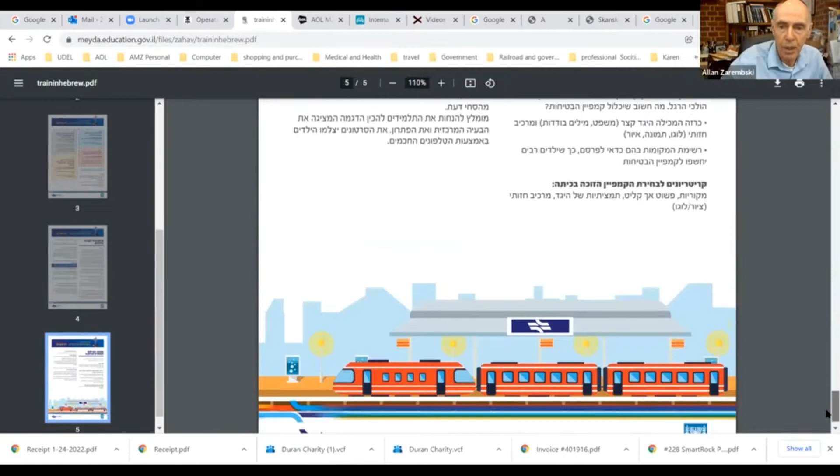But what I wanted to show you here is that there was a whole bunch of material put together in Hebrew. Let's see if it comes out here. There we go. So this is the kind of material, among other types of information, that's available in Hebrew for level crossing awareness. This is put out by Rakevet Israel and the Ministry of Transport.

Let me stop sharing this and let's start talking about turnouts.

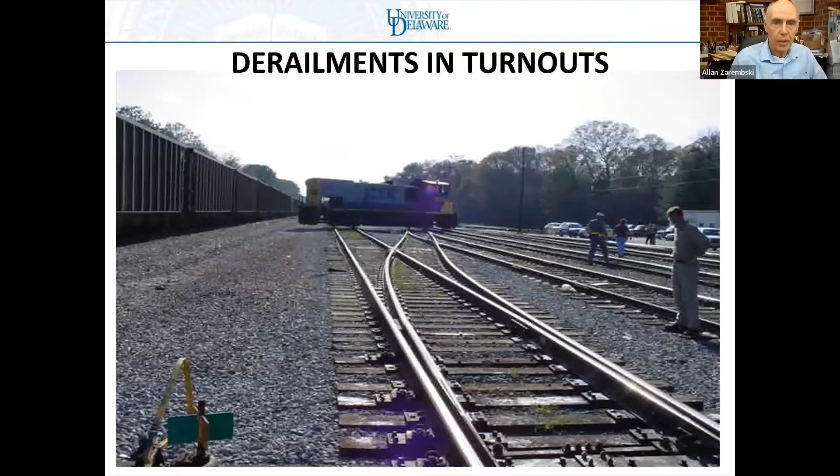So we're going to talk about turnouts in general, to include derailments at turnouts. For obvious reasons I like this particular picture. Not quite what happened commonly, but basically what you see is that the leading bogie was going down this track, and the trailing bogie more than likely got caught up in the frog over here, and instead of following the leading bogie down the diverging track - probably because the guardrails were not, in fact I don't even see proper guardrails in this picture.

So it looks like they may not even have proper guarding here. So the trailing bogie went down this track, and it's obviously not going to go very far before you get that kind of situation. Okay, so we're going to start off by talking about a couple of accidents in the UK. I like UK accidents when discussing Israel, because Israel Railways' heritage is British - for good, bad, or indifferent, it's heavily British, or used to be. So there's a lot of commonality.

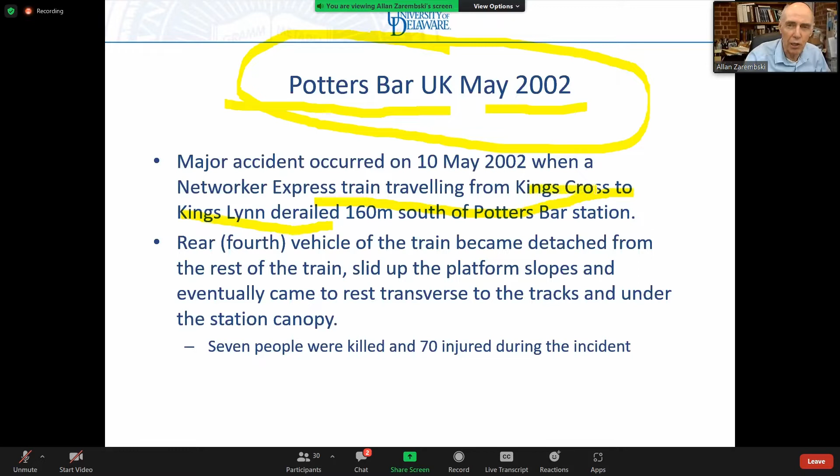So this was a very famous accident that occurred in a place called Potter's Bar - believe it or not, that's the name of a town in England. It happened in 2002. This was a train traveling on the British Rail main line from King's Cross, London, going to a place called King's Lynn, and it derailed just south of the Potter's Bar station. I'm going to show you some videos of this as well.

This train's fourth vehicle actually derailed and literally slid up into the platform and got stuck into the canopy of the station. 7 people were killed, 70 injured. So this was a real messy one.

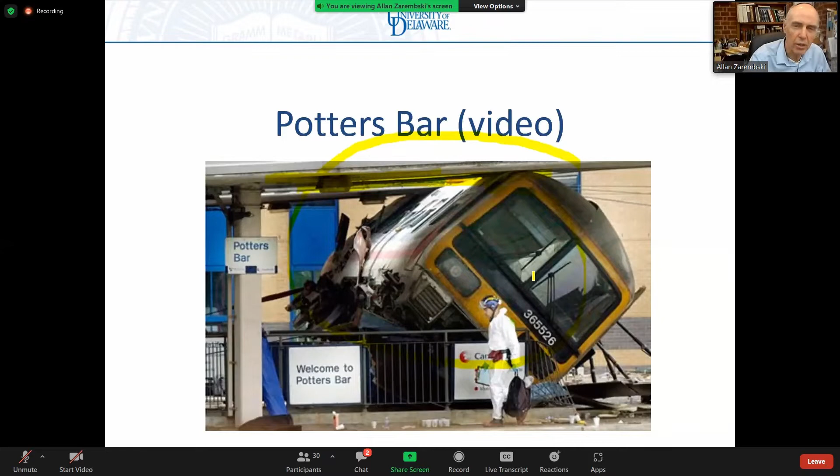Again, I'll show you some video in a moment, but you can see what happened here - this is the station platform, this is the canopy of the station, and this is the train, the fourth car that derailed. Again, you can see another picture of it - that was the end that was stuck under the station canopy right over there. And there it is again.

Okay, so in this particular accident, there was a malfunction at this point. I keep telling you it's really, really important to understand what causes these accidents so you can examine other cases and see if there are other accidents waiting to happen. In this case, after the accident, they found the cause, which was a problem with the switch points. There were 9 other switches nearby that were examined and found to have similar but less serious defects.

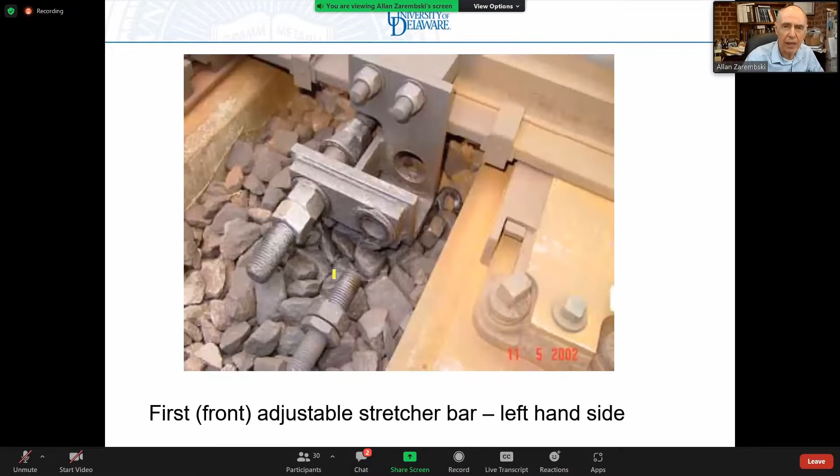So the point failed in such a way that the train was basically pulled - it went in between the switch rail and the stock rail. And as they got closer, the car actually just popped off the track. So what happened here, in fact, let me show you - there were actually some bolts that came loose.

And the bolts came loose from the right-hand end of the rear stretcher bar. So the stretcher bar is the bar that connects the left switch point with the right switch point. That makes sure that when the switch moves, it moves all the way in one direction.

Both switch points move all the way in one direction and all the way in the other direction. If for some reason the stretcher bars are not connected properly, then one switch rail can move and the other can stay the same, and you can end up going down the wrong end. In this particular case, the stretcher bar bolts came loose and were not found by inspection.

So not only was there a question of poor maintenance, but also poor inspection. Let's face it, this should be pretty obvious in a visual inspection. What happened to the inspection here?

At this point in time, when this accident happened, there was a maintenance contractor for that section called Jarvis, a British company responsible for all the inspection and maintenance. Again, there was a big question here: what happened? So let me just show you a quick video of that.

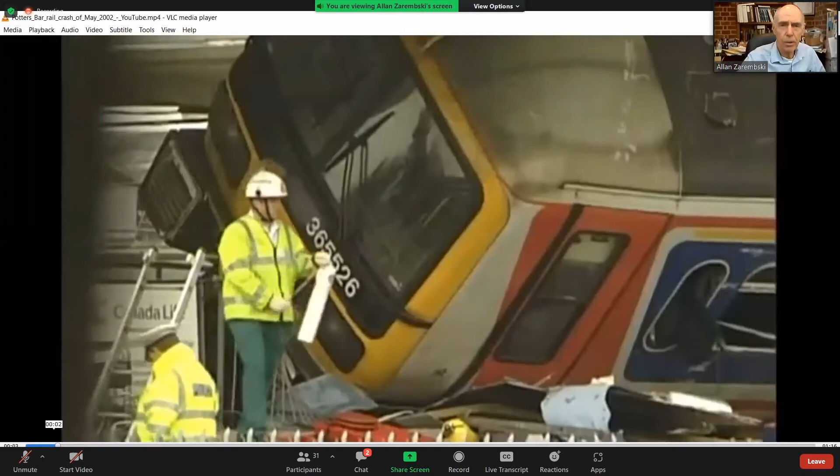Where are we here? Let's come back here. Let's come back here. Hopefully it's going to work. There it goes. So there's no sound on this particular one, but you can see. We can see the video. You cannot see this? No. Okay. Can you see the video? Can you see the video now? Yes.

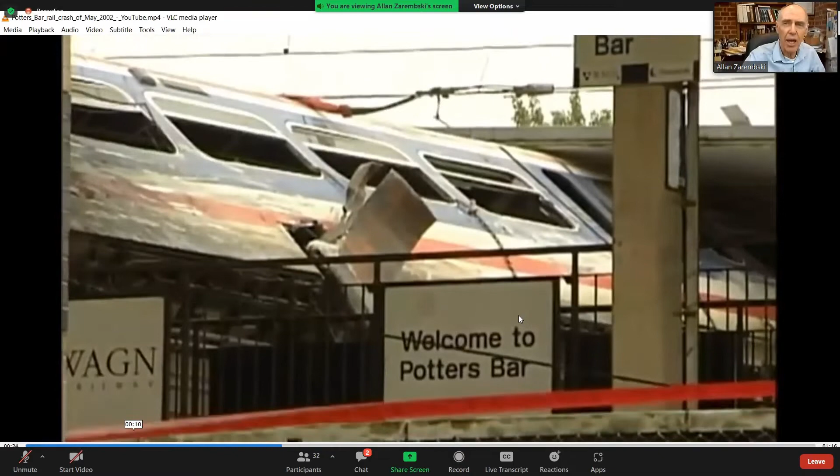You can see that leading into the switch is a fairly complex interlocking. Remember I told you a lot of times you see these kinds of buckles are the result of the accident, just like we saw in the Israeli derailment that I showed you earlier in one of the classes.

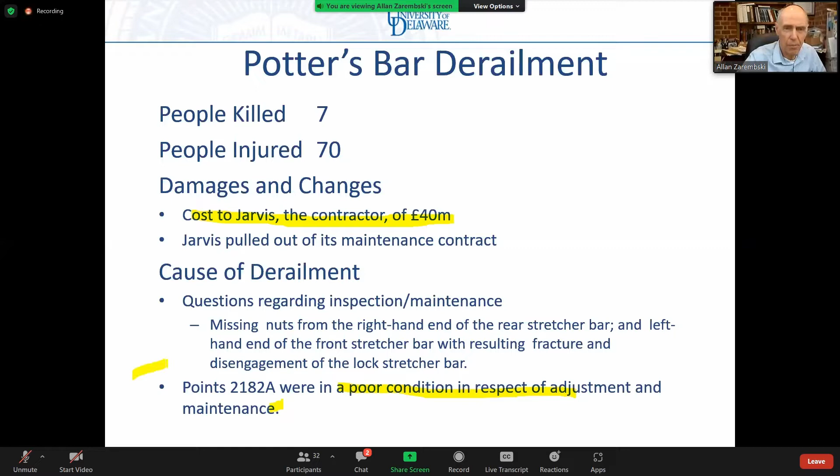Okay, so let's go back. Do you all see my slides again? Yes. Okay. All right. So you'd think that was such an unusual accident that they corrected the problems and would never see an accident like that again.

But that was 2002. Five years later, in a place called Grayrigg, there was an intercity mainline train running from London to Glasgow, Scotland, on what's called the West Coast Main Line, running along the west coast of England from London north to Scotland. This particular train was traveling at about 155 kilometers per hour when it derailed.

This happened in a very inaccessible location. It took 500 rescuers, 12 ambulances, 5 fire engines, 3 search and rescue helicopters, and 4 mountain rescue teams to get everybody out of that particular accident. One of the carriages fell down the embankment, and then a second one went down the embankment.

Again, it was another messy accident, and again it was caused by a faulty set of switch points. This was not a manual switch. This was a mainline operation.

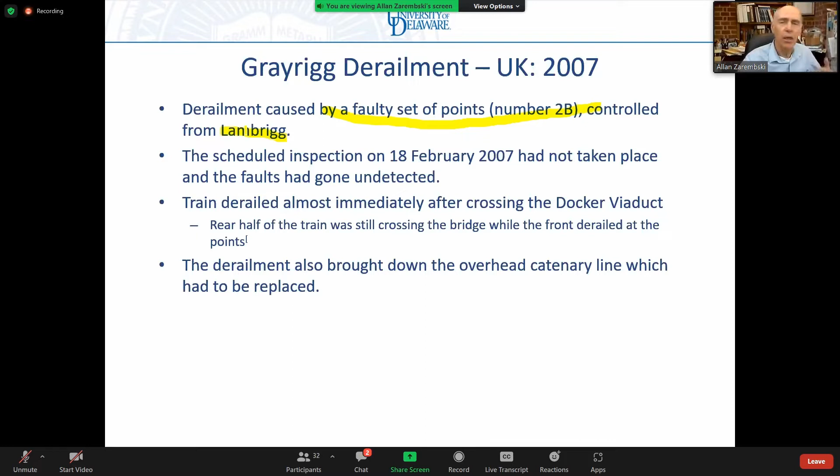So the switch was controlled from the dispatching center, located in a place called Lambrigg, down the road, not visible, but this was a mainline, fully automatic switch operating on the West Coast Main Line.

It turned out afterwards that the maintenance contract, again, was under a maintenance contract, and the switch inspection never took place, so they never detected the problem when it happened. Again, you can see London to Glasgow happened sort of in the middle of nowhere, in a place called Grayrigg.

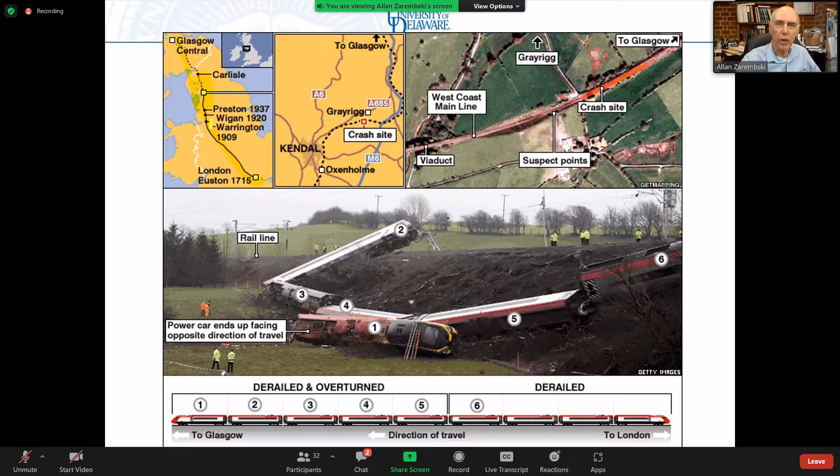You can see what happened. It was very remote territory out here, but you can see the engine and a couple of cars all down the embankment.

Cars 1 through 5 derailed and overturned. Car number 6 just derailed, and then cars 7, 8, and 9 didn't—nothing happened to them, they just stayed on. They were stopped in time. So again, this is the derailment scene.

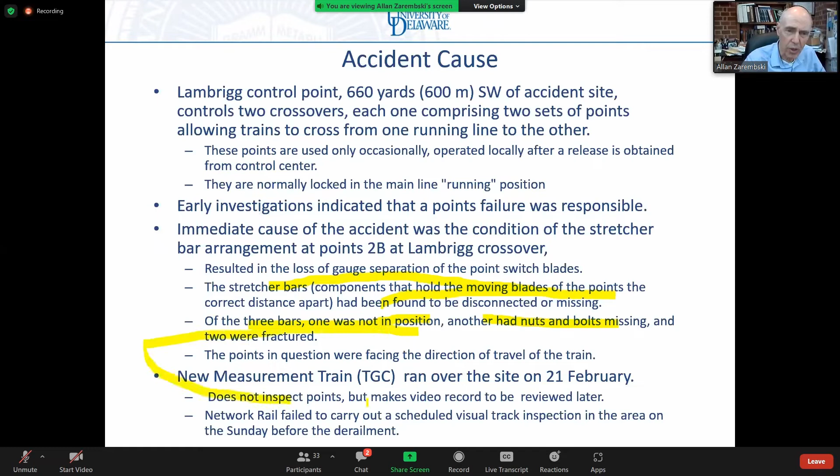So the obvious question was, what happened to inspection and maintenance? Again, this is a failing in inspection and maintenance, and it shows the importance of it. They did run an inspection train, their track recording car, over the switch not that much before the accident, but it does not inspect the condition of the switch blades. It makes a video that they were able to look at later, but at the time of inspection, videos are not usually inspected on a video train. One of the areas of technology being worked on right now is artificial intelligence that can look at video recordings in real time, and maybe that can be found in the future, but right now that technology doesn't exist. In this particular case, there was about 4 million pounds worth of damage, one person was killed, 22 people injured, etc.

Professor, how frequently are they supposed to inspect this? And a track like this, they should be doing a manual inspection twice a week. Somebody should be walking across that switch and looking at it, or either walking across it or driving across it at a very slow speed so you can see everything. That's typical manual inspection standards for switches and tracks.

Plus, there's supposed to be a detailed, comprehensive switch inspection, usually once a month. So twice a week you walk the inspection, and quite honestly you should be able to see missing bolts in a walking inspection. But once a month there should be a comprehensive switch inspection where, among other things, they actually move the switch points. Of course, a comprehensive maintenance operation, where you move the switch points and see what happens.

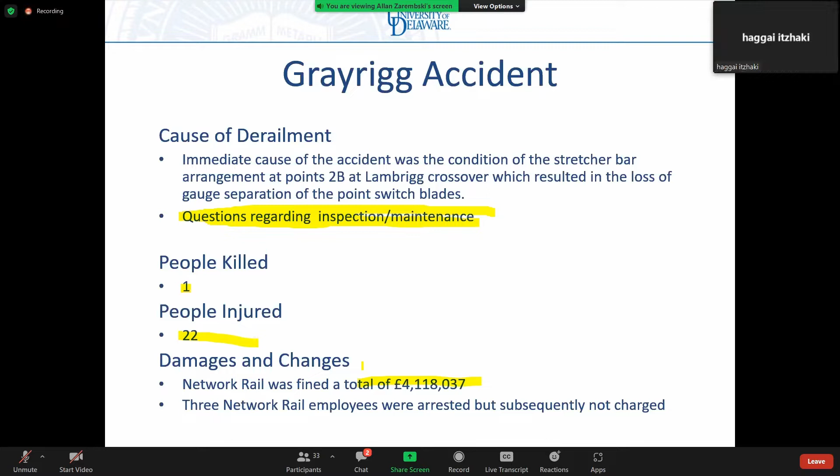Switch derailments are again a major category of derailments. When we look at track-caused derailments, usually you have track geometry, then rail and joint related ones, and then switch related ones. And when we look at the causes within switch derailments, the switch points, also called the switch blades, are the biggest cause of derailments that we see consistently.

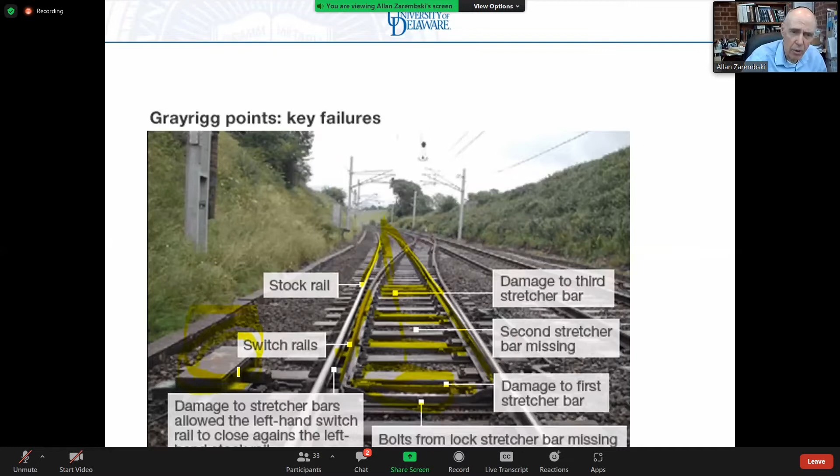What is a switch stand, please? A switch stand is a switch machine. Usually the switch stand refers to the manual version, where somebody can go over and physically move the points manually from a handle in the switch machine. But it also refers to, in this particular case, there is no handle here. This is fully automatic, but it's still considered to be the switch stand.

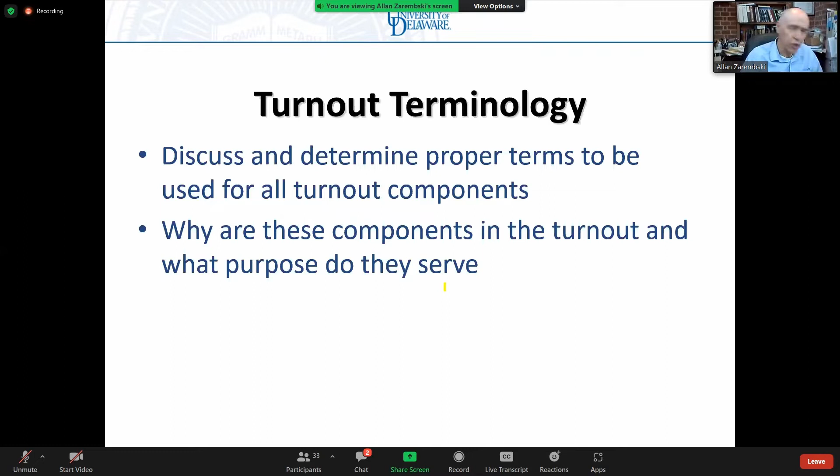Okay, so let's do a refresher of turnout terminology. Then I'm going to show you a couple of videos which give you an overview of the switch, and then we'll talk a little bit about switches and different types of switches, etc.

Typically speaking, a switch is okay. So again, terminology: in some parts of the world, this whole system is referred to as a turnout. In other parts of the world, this whole system is called a switch. And as usual, there's going to be some confusion in terminology.

So typically, a turnout is broken up into three parts: the switch or switch point, which is the movable portion of the turnout; the frog area, where the two rails cross each other; and the closure, where you have four rails that connect the switch and the frog—two of which connect the switch and the frog, and two which go straight through.

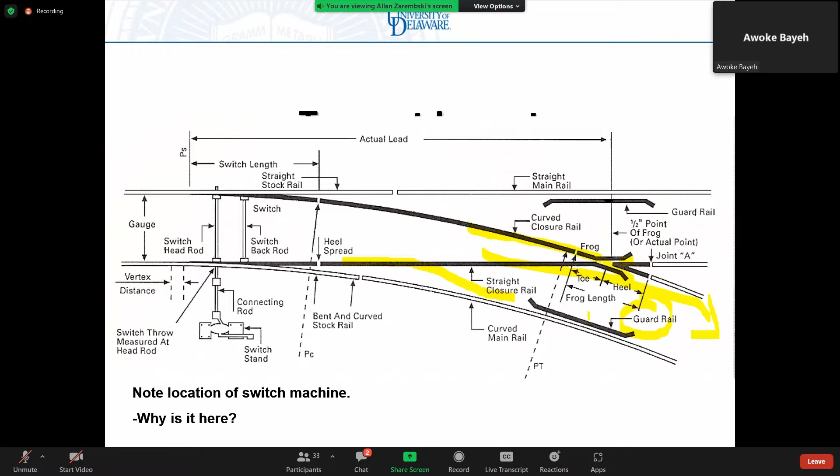I have one wheel that's coming down here, and I have a second wheel that's coming into the frog. What's going to make sure that wheel goes down this opening and not that opening, since they're pretty close to each other? What guarantees that is the guardrail. This guardrail right over here grabs this wheel and makes sure that the other wheel goes down the diverging leg where it's supposed to.

Similarly, if I was going down this leg, then this guardrail grabs this wheel and makes sure this wheel goes down this leg over here.

So you always need to measure the gauge between the guardrail and the frog? I'm going to get to that. There are actually 3 gauges that are involved, and they're absolutely critical.

If the guardrail gauge is wrong - let's say it's too wide, too far out - and it allows this wheel to go down in this direction, you have a wheel going down here and a wheel going down here. That's not going to work, and you're going to end up with that picture I had in the front, remember, with one half of the locomotive down one end of the track and the other end of the track down the other. That's exactly what will happen.

And again, you can see in this picture the guardrail. You can see the guardrail here. You can see the guardrail here in the frog opening.

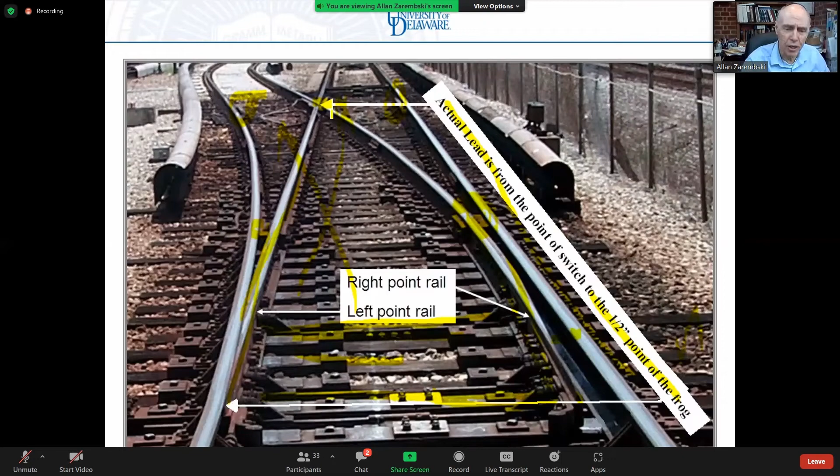Now, putting together a third rail and a switch, as you can imagine, is a little bit of a mess because you got to make sure it goes down each direction. So in fact, there's very often a gap in coverage. You can see here, there's a gap in coverage. So you got to make sure the gap is less than the length of a car or two, so you don't run out of power and your metro train stalls along the way.

The third rail, by the way, is underneath here. This is the protective cover or cover board for the third rail, to make sure a maintenance worker or a trespasser doesn't accidentally step on that and get electrocuted. Because yes, if you step on a third rail, you will get electrocuted - although this is one of the cases where the movies actually do have it right. By the way, you can see the switch machine just off in the corner over here as well.

Okay, again, straight closure rail, curved closure rail, straight stock rail, curved stock rail.

By the way, notice these switch timbers. Let's go back over here, this is a good way to see it. Basically, your switch timbers need to be fairly long because they have to go across all 4 rails before they finally separate over here. And then you have the extra long switch timbers in this particular case, where if you have a third rail, these are your third rail mounting switch timbers as well. That's why these are extra long over here.

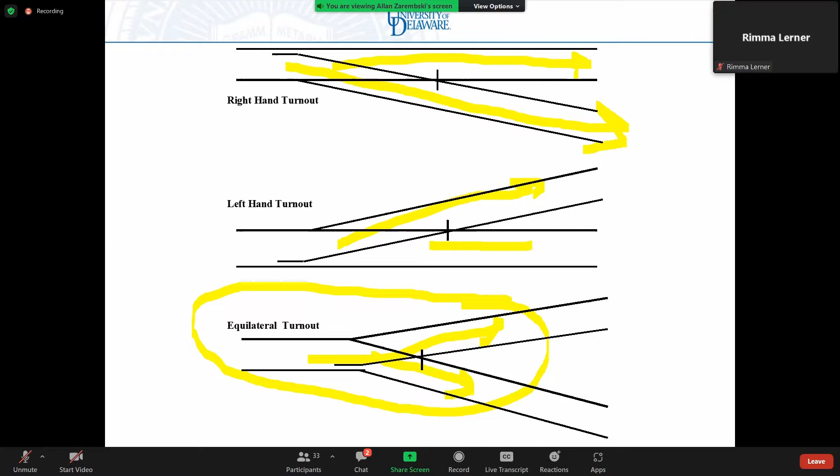Because in a traditional turnout, the dominant traffic goes through the straight leg, which can go at maximum speed. Because you're going through the curved closure rail, curved switch rail scenario on the diverging leg, you have to slow down. You're not going to go through that leg at the same speed as the straight leg, so you slow it down. What speed? It's a function of the turnout angle and the turnout length.

We'll talk about that in a few moments. But if I have the majority of my traffic going through the straight leg, I use a right-hand or left-hand turnout. But if you have half your traffic equally going through each leg, you want to compromise. By doing an equilateral turnout, you cut your switch angle in half. So although both sides have a switch angle, it's half the switch angle of a traditional right-hand or left-hand turnout. That means you can go through both legs at faster speed, and since both are equally important, you need the same speed on each. So you use an equilateral turnout to make sure you have the maximum possible speed equally through the two legs of the turnout.

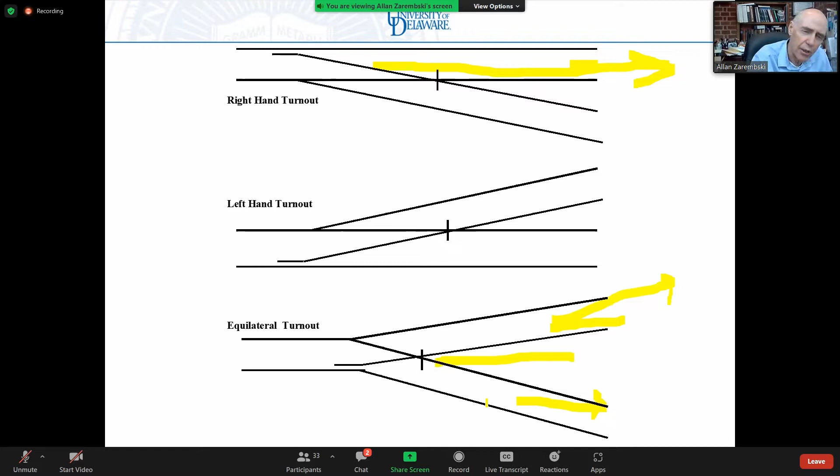What speed is again, it's a function of the turnout size. What determines the turnout size? Very often, it's what speed you want, so you pick a turnout size to match your speed. Sometimes it's a distance - for example, if you're building a metro and have to put a switch underground in a tunnel, sometimes you have to force that switch into a given location. You don't have unlimited space in a tunnel. So as a result, you sometimes have to control your speed as a function of what you can fit in there. Ideally, if designing from scratch, you want to design your switch to match the speed you want it to operate at, and pick a turnout size to match that speed. But that's not always possible, particularly in metros, but also in railways. Sometimes you're putting a switch into an industrial siding, a yard, or some strange location where you don't have a lot of space, and you're forced to live with what you have.

Continuing with terminology, a facing point move is a move in this direction where I'm going into the switch point - that's referred to as a facing point move. A trailing point move is coming from the frog to the switch point. You can see I have two options here: I can be coming from the through side or from the diverging side. In either case, it's a trailing point move. And of course, you've got to make sure your switches are properly aligned for a trailing point move as well. For example, if you were trying to come in from this side with the switches aligned in the other direction, you're going to have a slight problem.

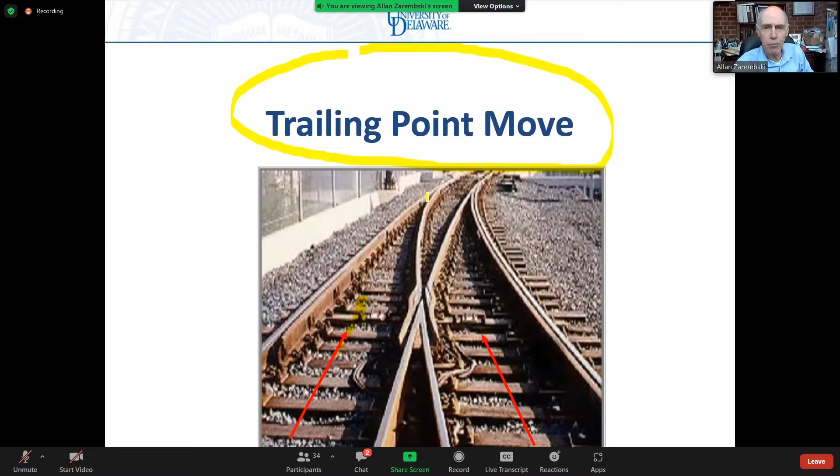Before I go further, I have two videos I want to show you that give an overview of switch, turnout and switch design, and then we'll come back here. Let me stop sharing this and come back here.

Is everybody seeing my screen share? No, we don't see the video, we see only your browser, your folder. You saw my folder? Now we don't. Can you see the video now? Yes, yes.

This is another one of those Network Rail videos that I like. You're going to hear the British switches terminology. Switches and crossings play an essential role in connecting the rail network. We use them to guide trains from one track to another and to enable lines to cross paths. Put simply, they're the junctions that allow us to create a multi-lined, multi-routed rail network.

At Network Rail, we own over 20,000 switch and crossing units. They come in many different shapes and sizes, and all are made to measure for their specific location.

To understand how switches and crossings work, we first got to look at the wheel-rail interaction. Train wheels move along the rails guided only by the pound-coin-sized area of wheel that sits on the railhead. The wheel rim, or flange, doesn't normally touch the rail. Flanges are only a last resort to prevent the wheels becoming derailed.

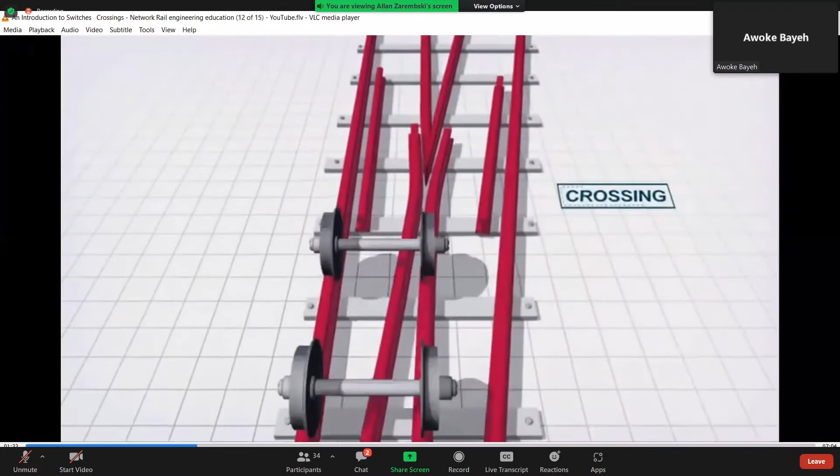A switch can guide a wheel in one of two directions. A crossing creates a gap in the rail for the flange to pass through - that's a frog. This is a switch, also known as a point. It's the moving part of the switch and crossing layout, made up of two long blades which can move across to guide the train one way or another.

This is the switch rail, and this is called the toe. This is called the stock rail - it's a non-moving part of the switch. The two switch blades are fixed to each other by a stretcher bar to ensure that when one is against its stock rail, the other is fully clear and will provide room for the wheel flange to pass through cleanly.

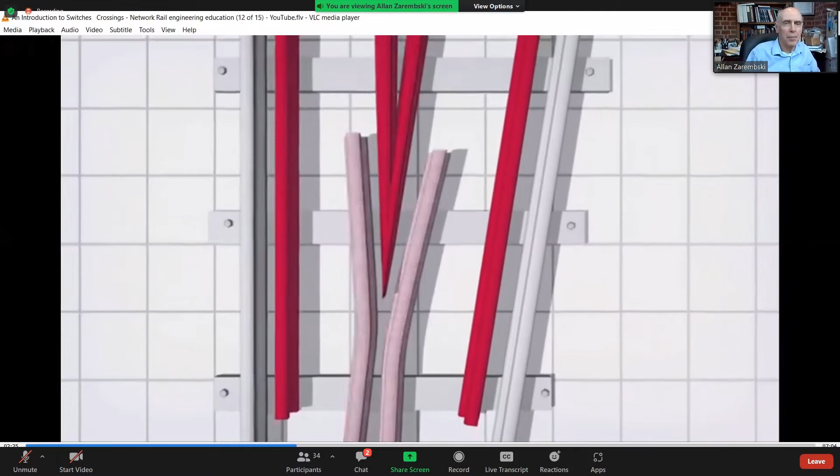This is a crossing, also known as a frog. It's the non-moving part of the switch and crossing layout that allows a train to pass in either direction once the switch has been set. This is the nose of the crossing. Either side of the crossing area, wing and check rails are provided to assist the guidance of the wheel sets through the crossing.

Check rails are the guardrails. Crossings can be either fabricated, made up of two machined rails joined together, or they can be cast as a single unit. Modern crossings are now cast from manganese steel, which is an advanced alloy that gets harder with use. This is an important property, as the nose of the crossing can take high impact loads as train wheels pass through.

The most simple form of S&C is the turnout. This is a left-hand turnout. As you can see, it diverges from the main route in a leftward direction. This is how it works.

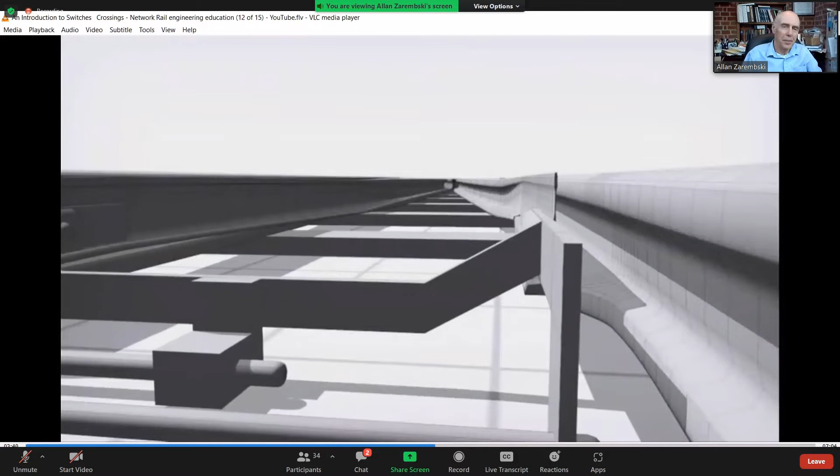In normal mode, the left-hand wheel rolls along the switch rail, and there's flangeway clearance for the right wheel to continue along the stock rail. The inside surface of the right flange is kept on course by the check rail. This restrains the wheel set and ensures it is directed along the correct route. Meanwhile, the left wheel transfers contact between the different parts of the crossing - that's where there's a high impact load.

In reverse, the right wheel rolls over the switch rail and follows its geometry. The inside surface of the left flange is guided by the check, forcing it to follow the stock rail on the new route.

And the right-hand wheel makes a crossing, again imparting a load on the crossing nose.

There are many different types of switch and crossing on the network. They include turnouts, diamonds, crossovers, and slip diamonds. The type we use is determined by a number of factors, including the number of lines involved, frequency of use, and running line speed. Trains travelling at high speeds need long switches and crossings. At low speeds, such as in stations, trains can make tighter turns.

Train movements across the network are set and controlled by signallers, who use switches to set routes for trains.

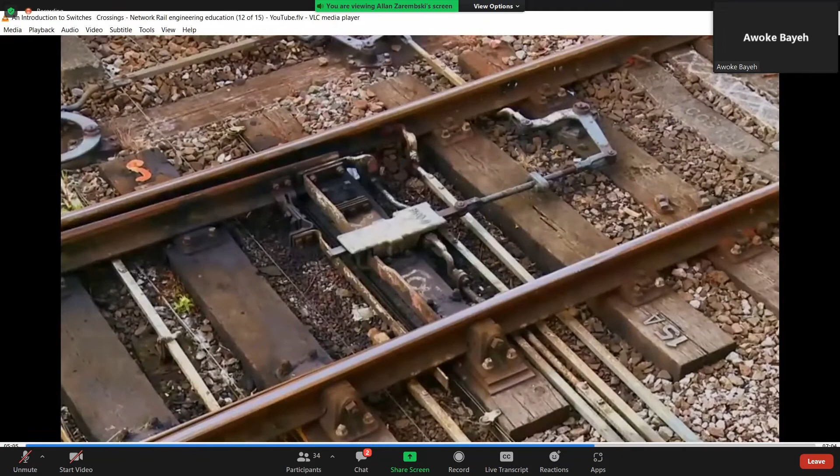Switches can be propelled by various devices. One of the simplest forms is a ground frame setup, a series of rods and cranks attached to levers, still in existence in signal boxes.

These are now largely being replaced by remotely operated hydraulic and electromechanical devices, seen by rail sides all across the country. This is an HW2000 points machine. This is electromechanical. What we have here is your drive motor. To check the motor has done its job, over here we have an interlocking and detection system. Detection tells us when the points have completed their travel and locked. Locking holds the points in this state, so they cannot be physically moved, so when a train runs over the top, it remains in position.

Facing point locks are one of the most important safety features on the switch and crossing layout. They ensure that the points cannot be moved when set. This is important because failure to lock the switches could cause a derailment.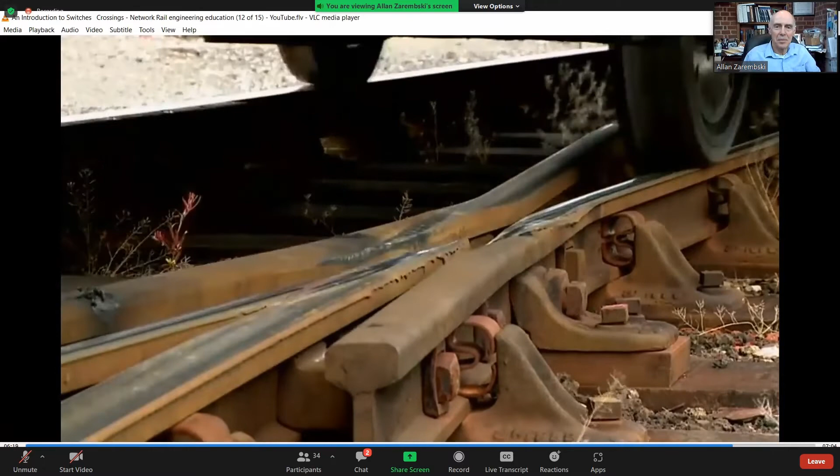As engineers, we face an ongoing challenge to maintain and improve our switch and crossing assets. Trains can create large impact and lateral forces as they change course, and these forces can cause wear and deformation. Switches and crossings therefore have a limited lifespan before we need to replace them.

Less than 5% of track miles are made up of switches and crossings, but over 17% of our maintenance budget is spent on them. We'll continue to research and develop new inspection techniques and material usage to increase their performance. It's all about creating a network that's safe, reliable and efficient. It's what we do.

Remember, it's a commercial by the British Network Rail, but it's a nice introduction. I have one more video. Okay, let me see if I can get the other one going.

Can you see, everybody see this video? Not yet? Not yet. All right, let's try it again. Okay, how's this? Wheels roll. Can you see it now? Yes.

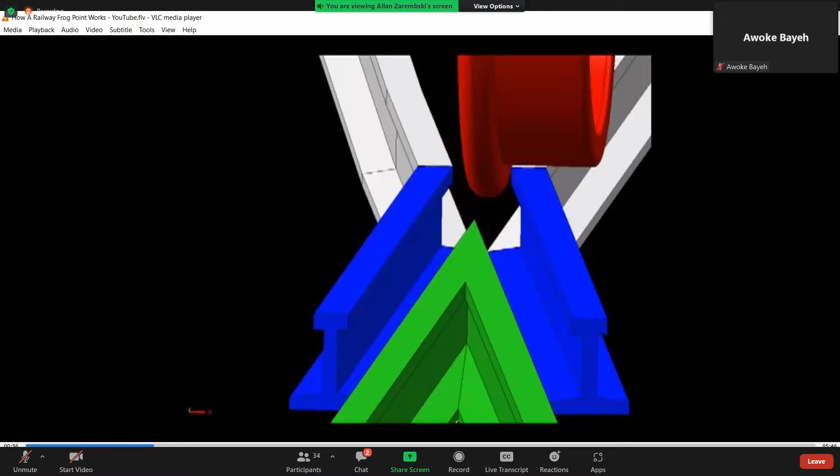Wheels roll through the frog on a turnout. What happens is the wheel rolls along onto the wing rail, shown in blue here, and it rides along the wing rail until it catches the point of the frog, shown in green. At no point is the wheel able to drop into the flangeway, the gap between the two rails, because it's firmly supported on those two rails. So it just rolls along the wing, catches onto the frog point as it's handed off onto the frog rail, and it rolls through. Because of this geometry, the wheel will roll through the frog without any bumping or dropping into the flangeway.

Now from this, you can see that it's key that the flangeway is as narrow as possible, and the tread of the wheel is as wide as possible to allow that to happen. It allows the wheel to roll down the wing rail, span across onto the frog point, and then roll onto the frog without any bumping. You can also see how the guardrail works. A turnout built close to the NMRA specifications, or right on, as ours are in the Fast Tracks assembly fixtures, will maintain all the relationships necessary to give you smooth running track work when you use wheel sets that are set to the NMRA specs. Most of the newer wheel sets available today, right out of the box, are compliant. However, little track work is.

Now I'm also going to show you the same thing with the RP-25, or Code 88, wheel sets running on a turnout built to the same specifications. You can build a turnout to different specifications to work well with RP-25 Code 88 wheels, but an out-of-the-box, ready-to-run turnout, or one built in our fixtures, might have a little bit of trouble. I'm going to show you what's going on there.

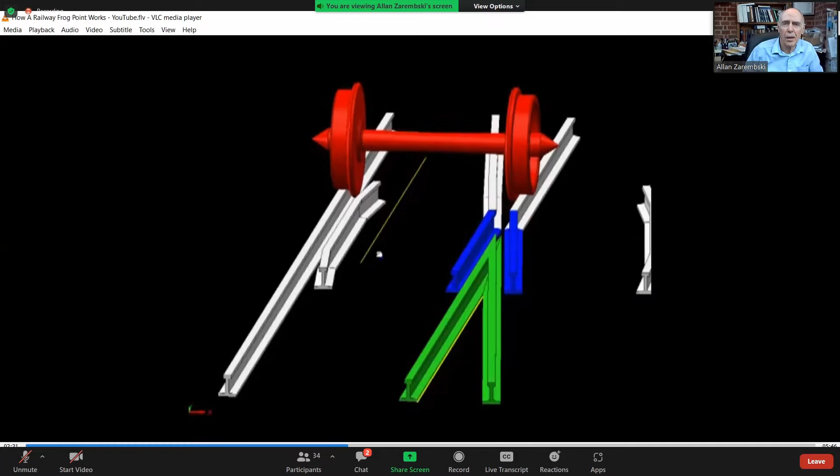Okay, here's the same wheel set. These are the RP-25 Code 88 wheels on the same turnout. I'm just going to roll them through, and you're going to see how with the narrower tread on the wheels, there's less contact at this critical location when the wheel is handed off between the wing rail and the frog point. We get in real tight.

You can see. I want to mention here that this is sometimes the problem you see in light rail systems. Because in a lot of light rail systems, you'll sometimes have a narrow wheel tread because you want to make sure that the wheel does not damage the pavement, particularly for street running. So a lot of light rail systems are designed with a narrower wheel tread, this distance right here.

But then you have to be particularly careful in your frog design, in your wing rail frog design, to make sure you don't have exactly what you're showing here. See, the previous wheel set he showed was a wider wheel set where there was a lot of interaction, a lot of contact between the wing rail and the frog in the transition.

Here, there's very little contact. It's possible for the wheel to drop down in. And that's the problem. Now this turnout that's drawn here, being drawn on a CAD system, is 100% precise, but a ready-to-run turnout, or one you build yourself, there may be slight inconsistencies in it, and it may cause this wheel to drop down in there.

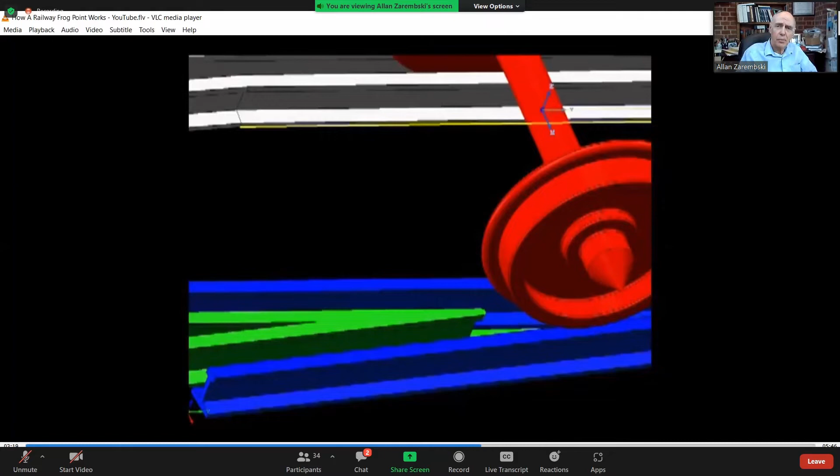Now, this will be especially true if the frog point isn't as sharp as it should be. Shown here is what a frog point of some ready-to-run track work sometimes looks like, where it's a little bit blunt, as you can see at the end. You can also get this when you're building your own track work if you're not careful to ensure you've got the sharpest possible frog point.

And where this really has an effect, especially with Code 88 wheels, is as the wheels are rolling through here, you can see that it's completely unsupported in this area. Right here, it'll bump. It'll drop down into the frog and then click onto the edge. And that little bit of bumping action can be the source of some trouble.

One way that some ready-to-run track work gets around this is they will actually fill in the frog. The frog flangeways will actually be filled in with plastic when they cast the turnout. This serves a couple of purposes. One, it aids in construction of the turnout, it holds everything in place. And two, it'll solve some of the wheel drop problem, in that as the wheels roll through the turnout, it'll actually roll across this fill that's in the bottom of the frog.

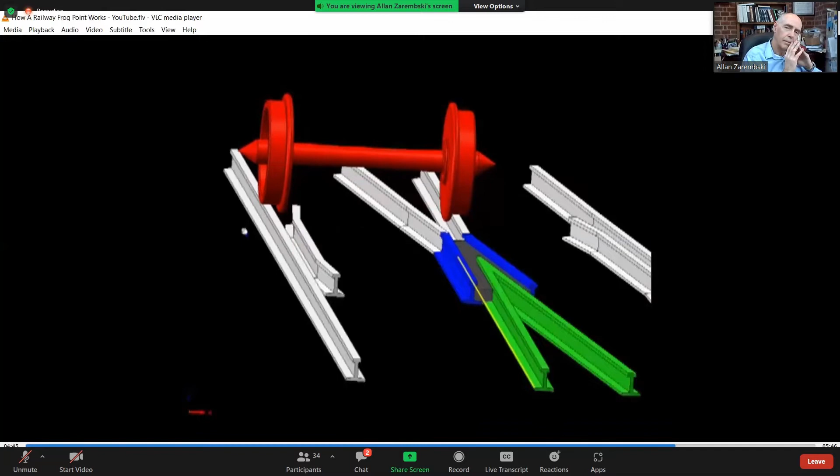One of the problems with this is if the flange diameter on the wheel is a little bigger or a little smaller than it's supposed to be, and that can vary from one manufacturer to another. What will happen is as the wheels roll through the turnout, you'll get a bit of a bump as it rolls along and hits here. If the flange diameter is a little too big, it'll actually lift up as it comes through the frog. And if it's too small, it'll still drop into the frog. So it's not the best workaround possible.

Yeah, one of the issues you deal with putting fillers in, and again this I see in light rail in particular, is that you end up having what's called a flange bearing condition, where the load is now on the tip of the flange, causing plastic deformation of the flange as well. That can, if you're not designed for it, be a problem. But it is used by a lot of manufacturers, and it's used for that reason.

The best way to use the Code 88 wheels is to actually build a turnout for that wheel with a narrower flangeway through here. And I'll get into more detail on how to do that, and the repercussions of doing that, a little later on.

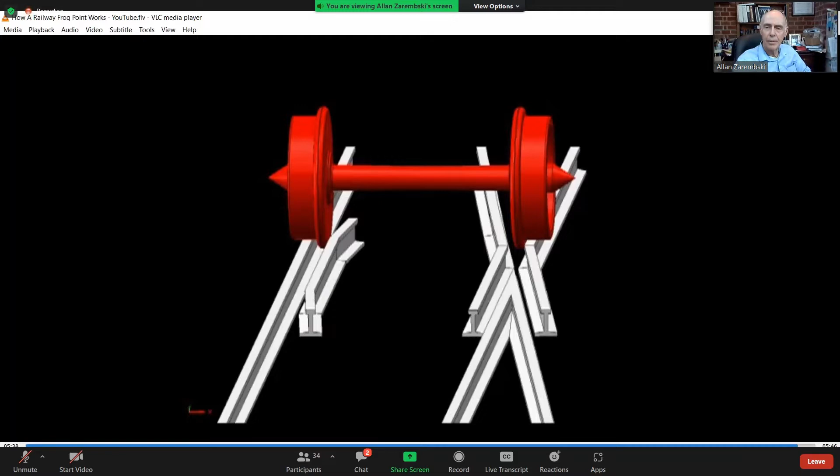So as you can see, there's a definite relationship between the wheels and the track work it's running on. It doesn't matter how well you build your track work, it's only going to run as good as the worst set of wheels on your layout. So you want to make sure that you have all those wheel sets set to your NMRA gauge. It's pretty straightforward to do - just make sure it fits in the little grooves in the NMRA gauge, and you'll have good running track.

Okay, we're going to come back to this when we talk about frogs, because I like this as a discussion item, but I figured I'd give you a little bit of an intro to that as well.

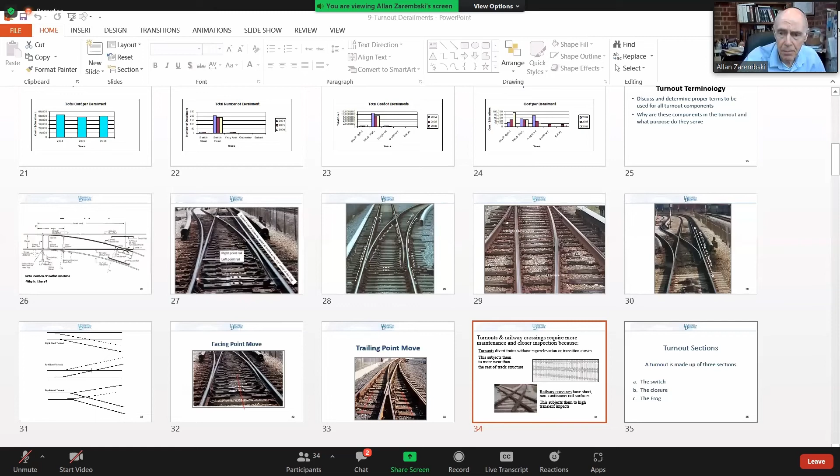So, turnouts, as one of the videos, I think the British video, said, talked about the fact that turnouts and crossings are very high maintenance items. I think the number he gave was between 3 and 4 times more expensive to maintain, on a relative basis. He said turnouts represented 5% of the track mileage and 17% of the budget, which comes out to be roughly 3.5 times.

I've seen other studies that go greater than that, where turnout maintenance on a per meter basis can be as much as 5 to 10 times as expensive per meter than conventional track. So turnouts are very much a major issue.

Now we're going to get into this in a little bit of detail over the next hour and a half or so. But one thing to remember is that although we have curvature in our turnouts and switches, we do not have any super elevation or cant in a turnout. A turnout is flat. You never introduce cant into a turnout, primarily because vehicles go through them at very slow speed, plus it's very difficult to maintain cant in a switch.

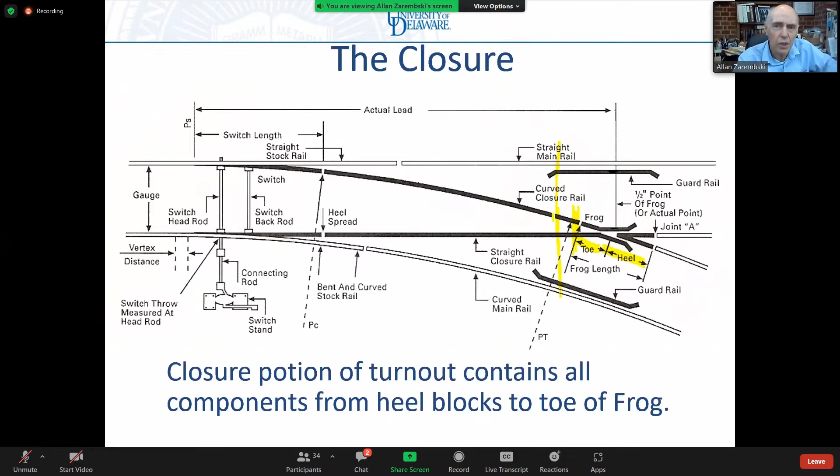So I already talked about the fact that the turnout is made up of 3 sections: the switch, the frog, and the closure. The switch goes to the heel block. The closure goes from the heel block to the toe of the frog. The toe of the frog is actually out over here. So when we look at the frog, we have the toe and the heel of the frog. The closure goes really to the toe of the frog. Then we have the frog, which goes from the toe all the way into where you separate out into your two separate tracks.

And we've gone through this switch stand, which throws the points, the connecting rods or switch rods, which we've talked about, point rails and heel blocks. I'm not going to go deeper here, I just want to introduce some ideas so you understand what's going on.

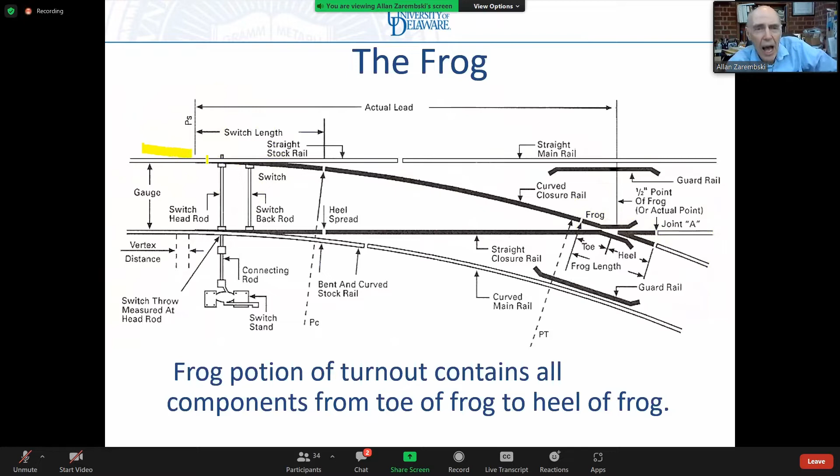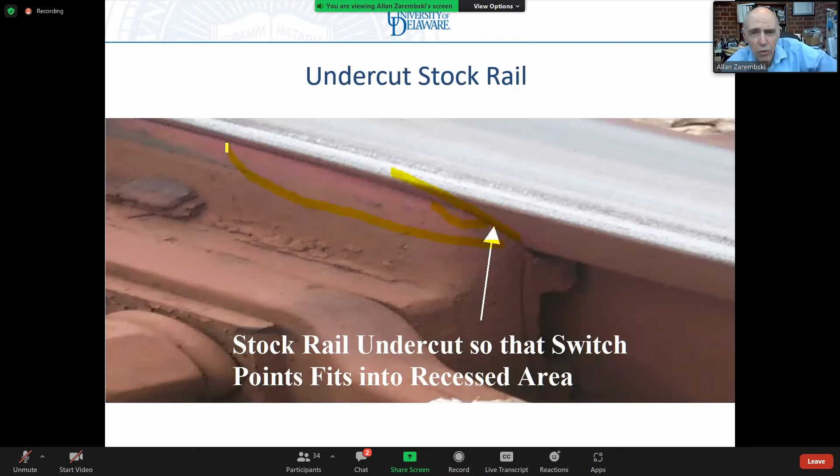These are real switch points, pictures taken from real track. You can see in this particular case how far damaged the switch point is. This whole area down here is already broken off, because this is very thin. If I go back here, you can see how thin that section is, particularly at the tip.

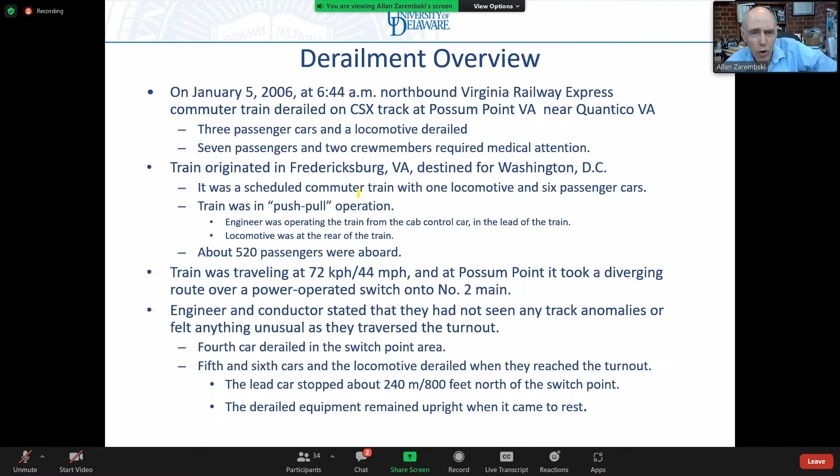Just real quickly, we'll talk about this derailment. This was a commuter railroad traveling at about 70 kilometers per hour, and the fourth car derailed in the switch point area. The first three cars - this looks a little bit like the Kfar Menachem derailment, doesn't it? Where you have the third and fourth cars derailed and not the beginning one. This was actually very similar to the Kfar Menachem derailment in that the wheel of that fourth car actually climbed up on top of the stock rail and traveled along it. The wheel climbed up on the switch point, traveled along the stock rail for a while before it fell off, traveling on the flange on the stock rail. There were well-defined wheel marks in the process.

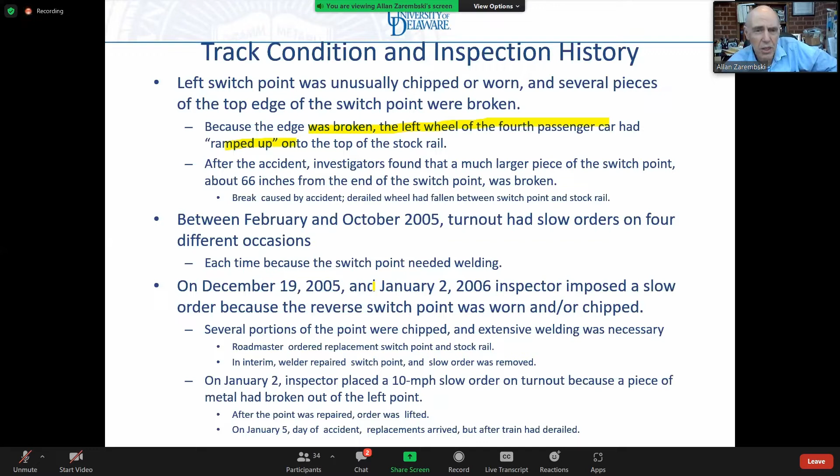Let me see if I can get rid of that marking so you can see it a little bit clearer. Yeah, so you can see there's like a little ramp over here that the wheel climbed up on. And then there was also a large break at the end as well. This had actually been repaired a couple of times by welding.

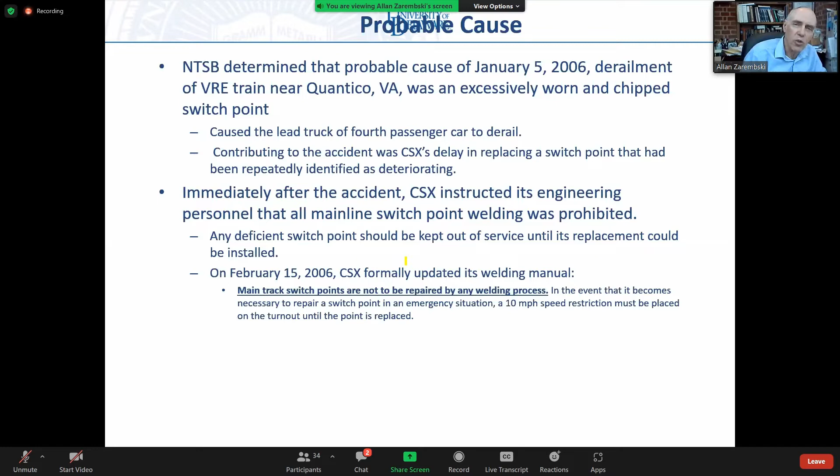Because the welded switch point is much weaker than the parent switch point, most railroads, certainly most U.S. railroads, now do not allow repair of switch points by welding. If you have an emergency situation and don't have a replacement switch point, then you have to put a 10 mph speed restriction on it to make sure you don't generate excessive dynamic forces.

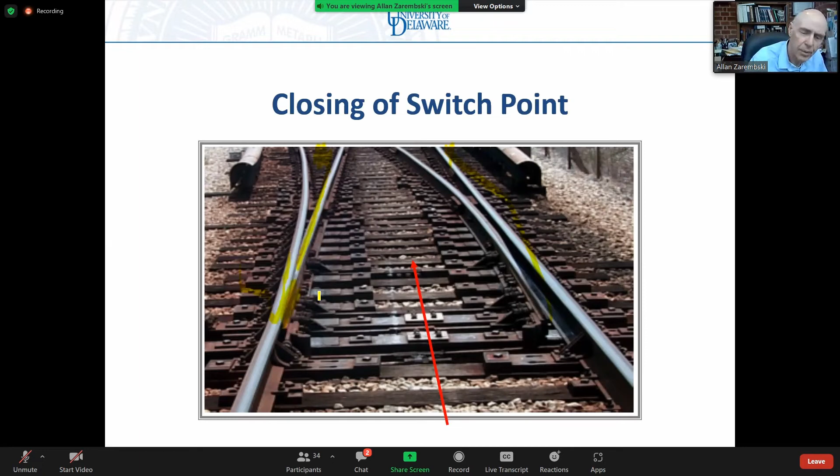Now, to prevent that from happening, there are what we call point protectors. Point protectors are designed to do a couple of things, but primarily, a point protector is designed to prevent a wheel coming along and smacking into the switch point, and in some cases, picking the point as I showed before.

There are a couple of different designs of point protectors. Metros tend to use point protectors very extensively. For example, New York City Transit, which has a massive number of switch points, something on the order of 10,000 switch points alone, has some type of protector on every one of their switches.

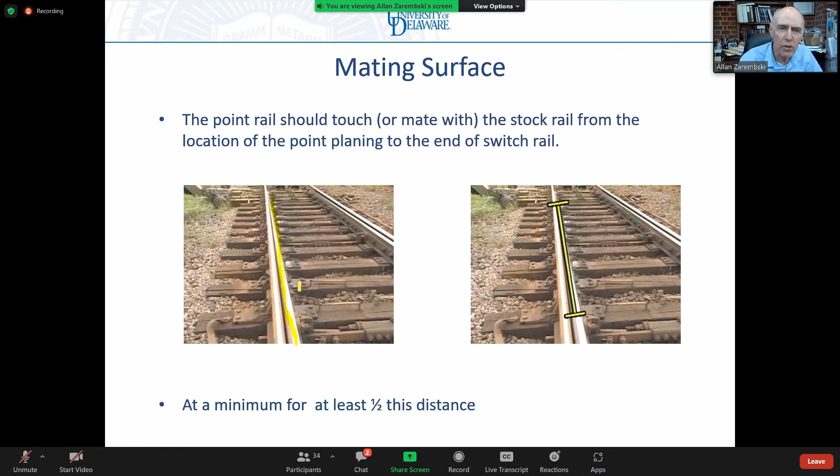Okay, point rails. So now we're going to go into that. There are three different types of switch points, or point rails, or switch blades, depending on what we're talking about. We're talking about the portion of the switch blade or switch point from the point to the heel block. So I have a straight point, a curve point, and a tangential geometry point.

A straight point, which is what most of the pictures I've shown you up until now, the point is straight. There's no curvature in the point. In this particular case, both points are straight, and this has a very sharp angle, but it's the shortest distance. It has a very short length, a very high angle, and you can see there's actually a transition - an angle between the switch point and the curved closure rail. So you're going to see a dynamic impact load right over here. This is the cheapest design switch point, which is why it's used, but it's also the lowest speed because it has the highest angle and that transition.

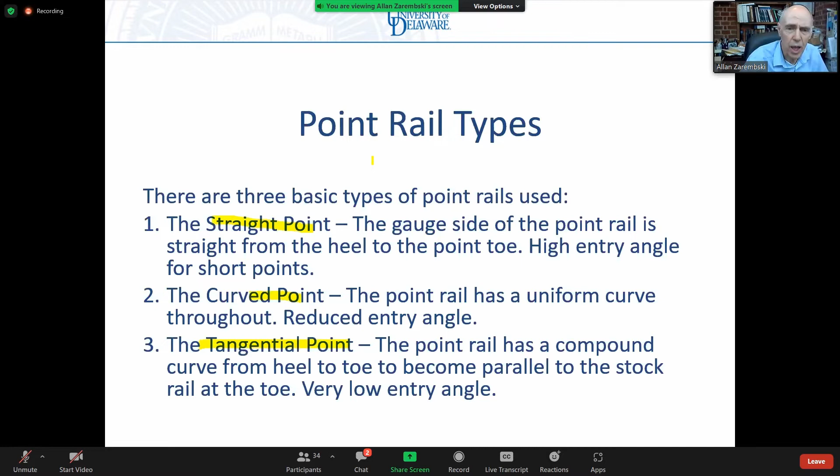The curve point has a uniform rate of change of curvature - excuse me, it has a uniform curvature, not a rate of change, only a constant curvature. So it has a fixed curvature, basically a constant radius throughout the curve point. It has a smaller entry angle than the straight point, and also a reduced transition - really doesn't have a transition between the switch point and the curved closure rail, which means I can go at a higher speed. It's going to be a little bit longer because it's now curved as opposed to straight, but it allows me to go to a higher speed going into that diverging leg of the turnout.

The tangential geometry point basically has a compound curve. Ideally it has a uniform rate of change of curvature, so R varies from the entry to the heel block. I have a different radius of curvature, my angle is different, but it's uniformly changing. That means I have the best dynamic performance laterally going through from the point to the closure rail because I have a rate of change of curvature. I don't have a constant angle or a constant radius of curvature - I have a rate of change of curvature, and that allows me to go the highest speed through the turnout, but it also requires the greatest distance.

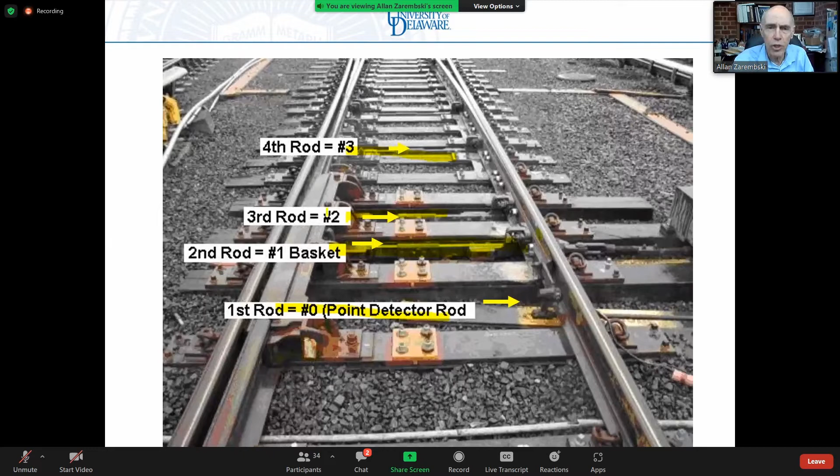Okay, you either understand everything or... excuse me, what is a rod? The rod is the connector bar or stretcher bar. It is the connector between the left switch point and the right switch point to make sure that the two switch points move together. Okay, thank you.

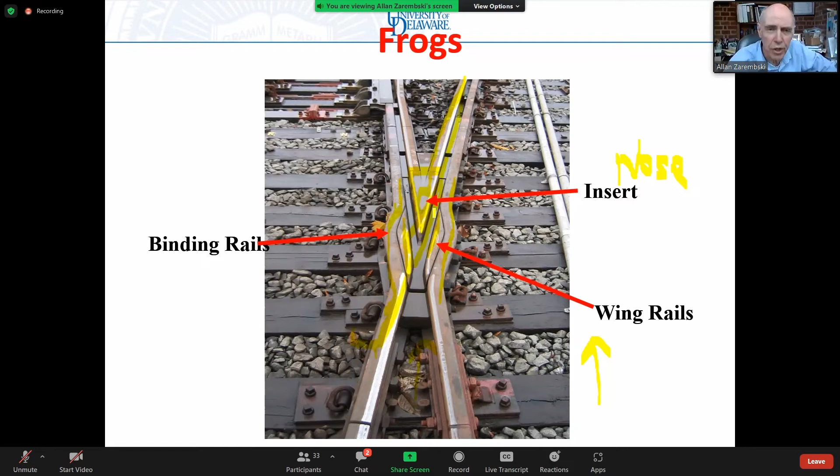But again, notice the stiffness here. So again, we're going to be dealing with some high impacts, and we'll talk about that in a couple of moments. Again, you can clearly see the flangeway for the two wheels. The guardrail is what holds the flangeway, and make sure you go to the right flangeway for the right direction of the turnout.

Okay, so looking at it in a more accurate point of view, again, you can see the throat of the frog. You can see how your wing rails come through here. This is the toe of the frog here. Again, this is the facing move direction. This is the heel of the frog.

This is the frog angle, which is also the turnout angle. This angle right over here is my frog angle. We'll talk about in a few moments how to calculate it, but I think we've discussed that in a previous lecture.

Okay, now one of the things to notice is if I look at my frog here in the diagram, you see I have the point where my two external lines actually meet, called the theoretical point of the frog. It doesn't exist, it's a theoretical point. The actual frog, though, is cut back a little bit. Why? Because if I allowed it to come to a really sharp point, it would get mashed to pieces by the wheel, and probably damage a number of my wheels as well. So I basically chop my frog back a little bit. So the actual point, the real physical point, is a little ways back from the theoretical point.

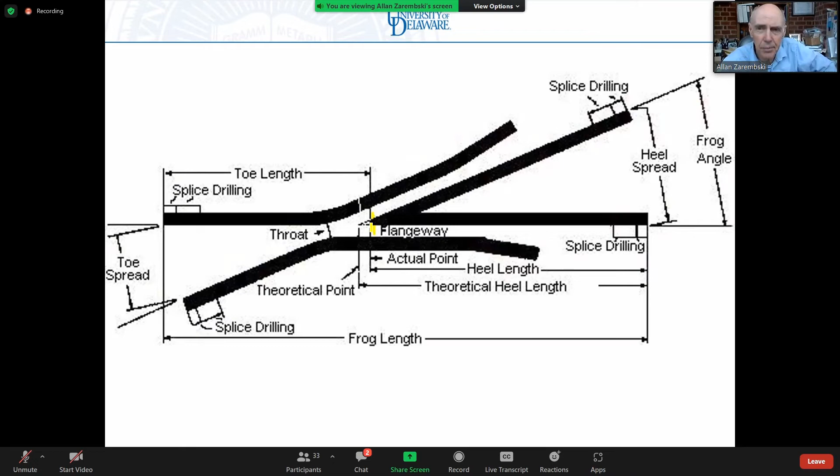The exact distance there often depends on the design of the frog. We talked a little bit about the frog angle. The frog angle, or frog size, is also the turnout size. So a number 20 turnout is a number 20 frog. A number 10 turnout is a number 10 frog. A number 20 turnout has an angle of 1 in 20.

So that means this distance is 1, and this distance is 20. So that's 1, that's 20. If it's 1 in 10, that distance is 1, that distance is 10.

Typically speaking, the larger the number, the smaller the angle, and of course, the greater the speed. The normal range of frog sizes is between 1 in 4 and 1 in 20. Frogs and turnouts greater than 1 in 20 are considered high-speed turnouts. So things like 1 in 24, 1 in 32, those are considered high-speed turnouts.

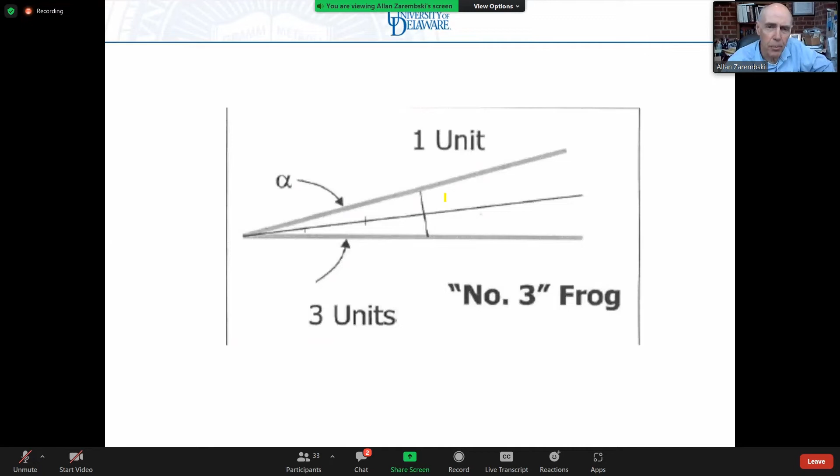So again, this would be a number 1, a number 3 turnout, 1 in 3. That's a very sharp, very large angle, and as a result, that's going to be a very low speed turnout.

We talked about the difference between the theoretical point and the actual point. So let's make that very clear here. You can see the theoretical point is where I theoretically have my intersection. If I drew a tangent line from the nose of my frog out to where they intersect, that's the theoretical point. The actual point, as you can see here, is cut back because we don't want a little point there. You can see the wing rails and the rail that hold everything in place.

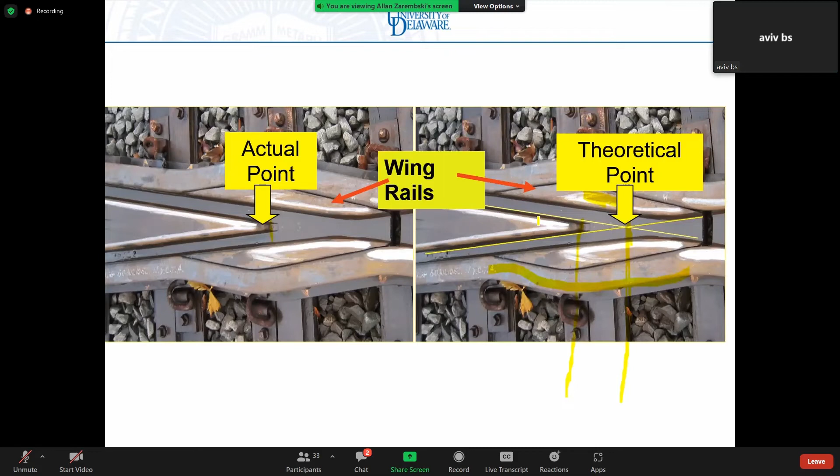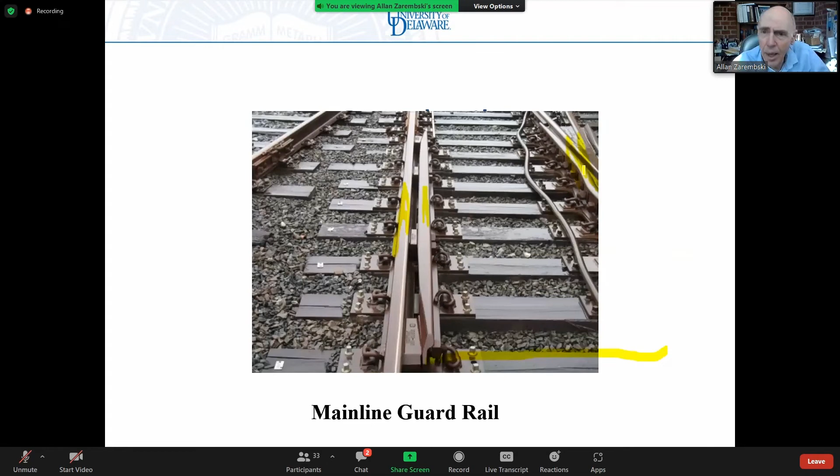Now, we talked a little bit before about the fact that the guardrail dimension is critical. Well, which guardrail dimension? There are actually two major dimensions. Let's look at our scenario here, so everybody understands what we're looking at. We have our running rail over here, and our guardrail, which in this picture is slightly higher than the running rail - you can see it's a little bit higher. And then we have our flangeway.

So we have one flangeway and we have a second flangeway - we have two openings. I have my running rail, my guardrail, my frog with my two flangeways, this is my wing rail over here, and this is my wheel. So what are my two critical dimensions?

My two critical dimensions are basically - remember, this guardrail is designed to make sure the wheel goes through this side, and this other side is controlled by the guardrail on the other side. So I have two sets of measurements: one flangeway dimension with this guardrail, and one flangeway dimension with that guardrail. I have one measurement from the inside of my guardrail, which is also the back of my wheel flange - but if I'm measuring it in track, I'd be measuring from the side of the guardrail to the inside of this flangeway. Then I have a second measurement from the inside of the guardrail to the outside of the flangeway. Why am I doing that? Because I can get batter and degradation and wear in my flangeway as well.

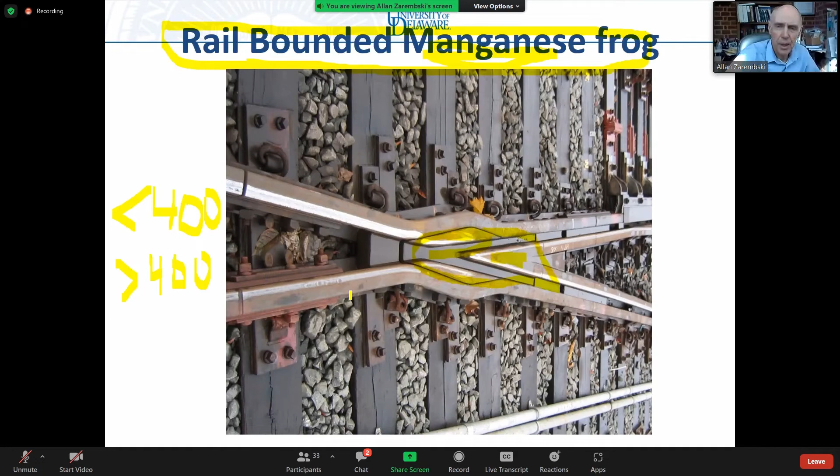Why do we do that? Because it's subject to greater impact forces, so we're concerned about impact forces. In fact, in some cases, the frog is even explosive hardened. Remember, rail steel is always less than 400 BHN for hardness, but frogs are always greater than 400 BHN. They're harder than the parent rail, and the reason again is we have this battering issue that we have to deal with. So the rail-bound manganese frog is the most common one, using a casting that includes the nose of the frog and the wing rails.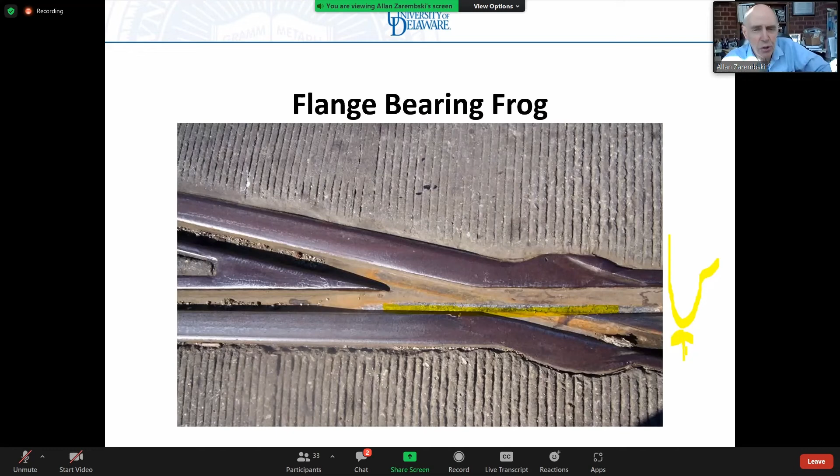The problem with this is it puts a very large amount of stress in the tip of the wheel, and you end up getting plastic flow and potential failure of the wheels. But if you only have a couple of them throughout, you may not cause catastrophic failure of your wheels.

Just very quickly, let me show you a few more applications. This is a typical ladder track and a switch - we talked about that. These are all switches on switches on switches, all designed to have parallel yard track.

This is a crossover, which we talked about in an earlier lecture. This is basically two switches, or two turnouts - two switches, two frogs really. I have a switch over here and a switch over here, and I can go in this direction to that track, or in that direction on this track. But if I only have a single crossover, if I'm coming along in this direction I can't get over to this track, and if I'm coming along in this direction I can't get over to this track. I would need a mirror image of this crossover in the opposite direction to give me full capability.

So that would be a double crossover, which is what you see over here. This is a single crossover, which only gives limited movement from one track to another, and this is a double crossover. Here I can go from this track to this track, from this track to this track, and of course I can go straight on both tracks as well. So I basically have 6 combinations of movement with a double crossover.

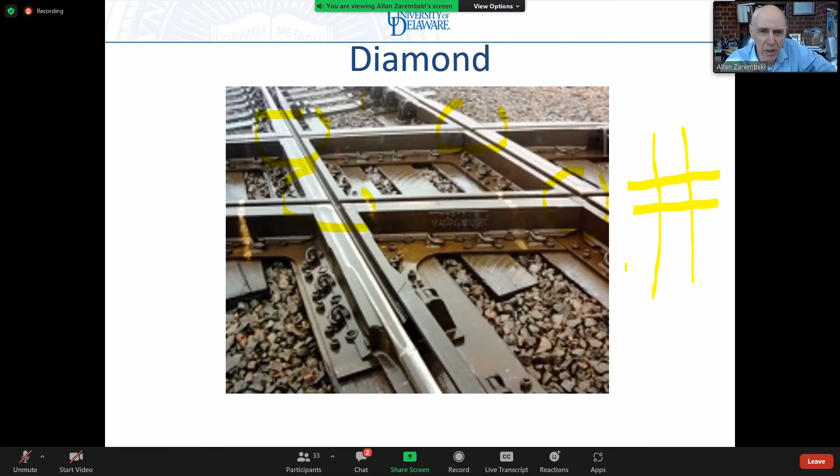Real quickly, a crossing diamond is when I have two tracks that cross each other at grade. I do not have a switch here, and I do not have the ability of moving a vehicle from one track to another - not that they can do a 90-degree turn here. In this case, I have one track crossing the other track, and I basically have the equivalent of 4 frogs. They're not really frogs, they're diamond crossings, but they're basically allowing 2 rails to cross each other.

Here you can see a switch going into a crossing diamond. You've got a switch here, a switch here, and a crossing diamond over here.

This is a double diamond - one of your worst maintenance nightmares you can ever run into. If you're doing track, you sometimes have no choice in designing this, but if I have 2 tracks in this direction and 2 tracks in this direction, I have this monster, with rails crossing each other at 16 locations. This is one of the biggest maintenance headaches in the infrastructure world.

Okay, speed through a turnout. Oh, this is the metric version, sorry.

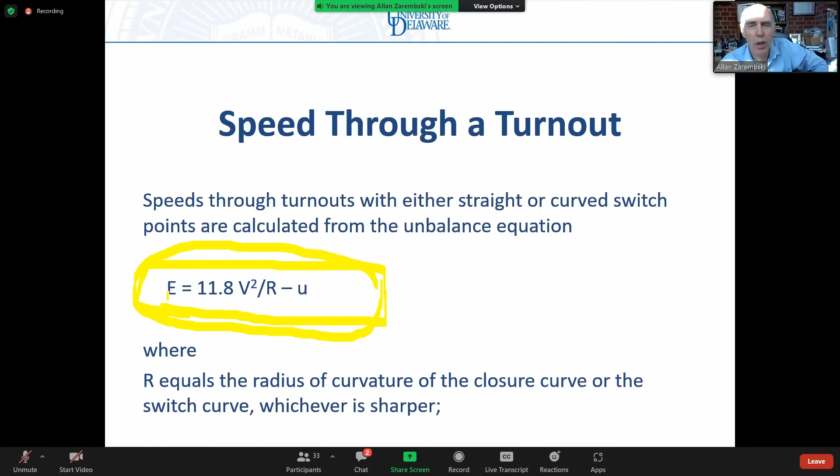Speed of the turnout is actually calculated from the unbalance equation. This is the metric equation: speed in kilometers per hour, R is the radius of curvature in meters, U is the allowable imbalance, and E equals zero because there's no elevation or cant in a turnout.

These are pretty much tabulated. I'm going to skip a couple of these. These are all in miles per hour, so we'll convert to metric in a moment. You can see I have straight points, curve points, and tangential geometry points.

Again, the standard turnout ranges were about 5 to 20, 6 to 20. If I took a number 12 turnout, which is a common turnout, it has a 22-foot switch point, roughly a 7-meter long switch point. A conventional turnout, either right hand or left hand, allows me a speed of about 27 miles per hour, a little bit over 40 kilometers per hour. Let's say 43 kilometers per hour.

If I had an equilateral turnout where I'm going in either direction, I can go 38 miles an hour, which is about 60 kilometers per hour. By the way, this is why we use equilateral turnouts. But again, this is with a straight switch point. If I take the same number 12 turnout with a curved switch point, this has a constant radius of curvature.

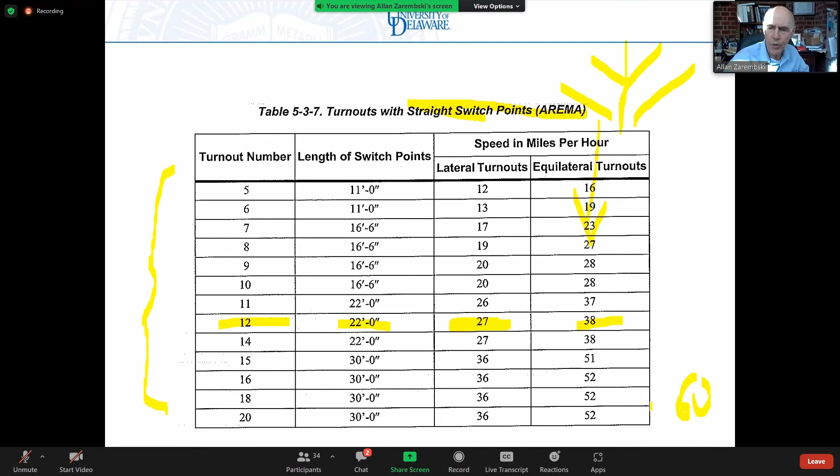The other point I want to mention is where we see our maximum forces going through the switch point. If this is a facing point move, I have a large impact point at the switch point. It stays up there, and then I hit it again at the frog. So my actual maximum lateral force is at the point of the switch. My maximum vertical force is at the frog.

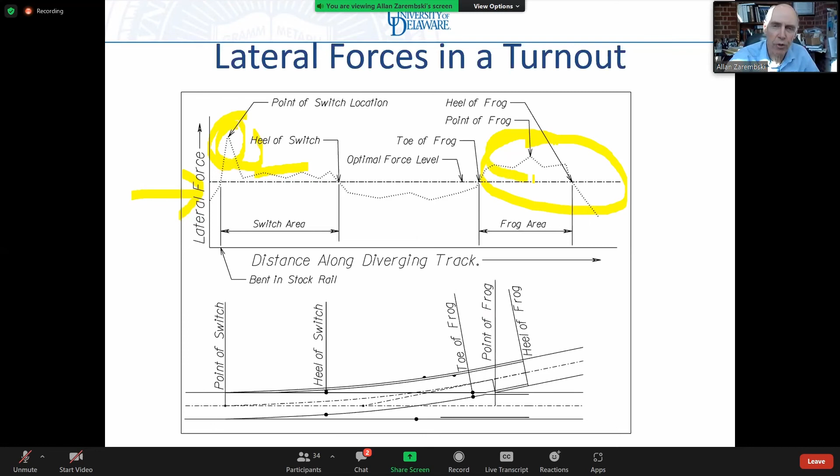I'm going to skip this derailment discussion, and I want to close by showing you some of the newer technologies being used in switches. Let me get a picture of the switch. One of the more common technologies we see more and more is instrumentation of the switch machine itself, where we measure the closing force or the force necessary to throw the switch, and we measure the seating, whether there's a gap between the point and the stock rail.

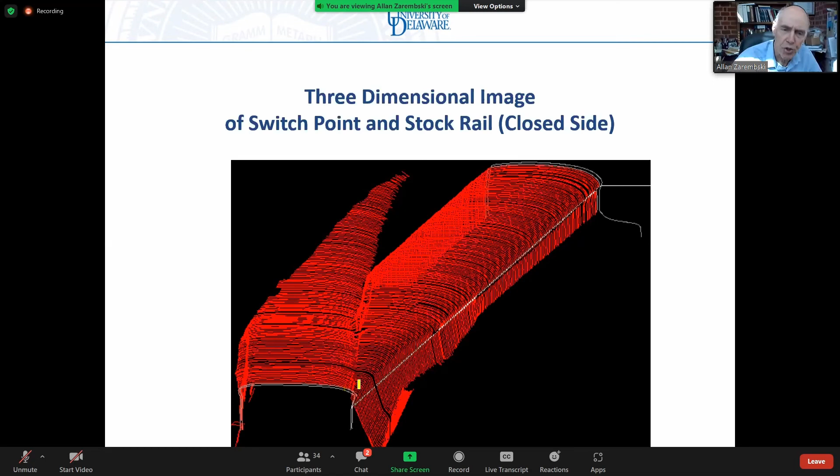Some of the newer technology is also looking at using the same laser systems used to measure rail profile to measure the switch. What you're seeing here is a series of slices, roughly every 25 millimeters, representing several thousand slices through the rail. This would be a switch point stock rail combination, where you have the switch point here, the stock rail here, and you can see how it fits very nicely all the way through. Each one of these is an image, and you can actually measure the gap, measure the side, any damage to the switch point. This is some of the newer technology that's out there.

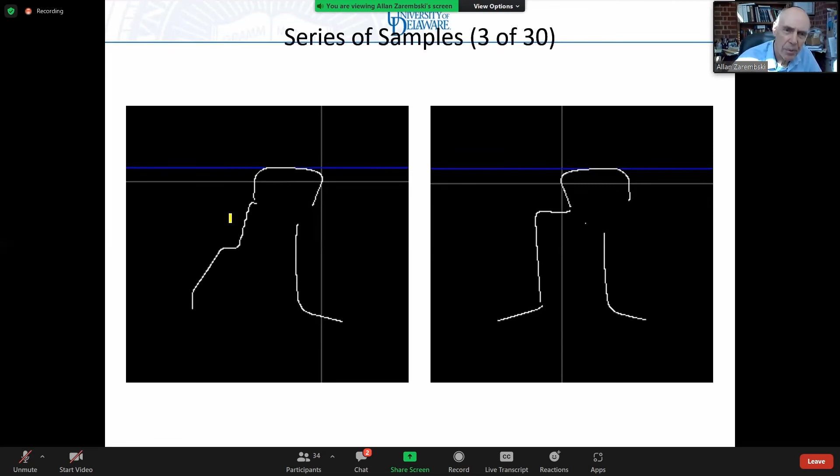This is a frog and a wing rail. There's your wing rail, there's your frog. Again, that's your direction of travel. So what you're really looking at is a series of these slices, and you can start seeing your switch point right over there. Just watch your switch point build up.

And then you put together the composite views. Again, just to finish up here, because I want to leave a few minutes to talk about the exam.

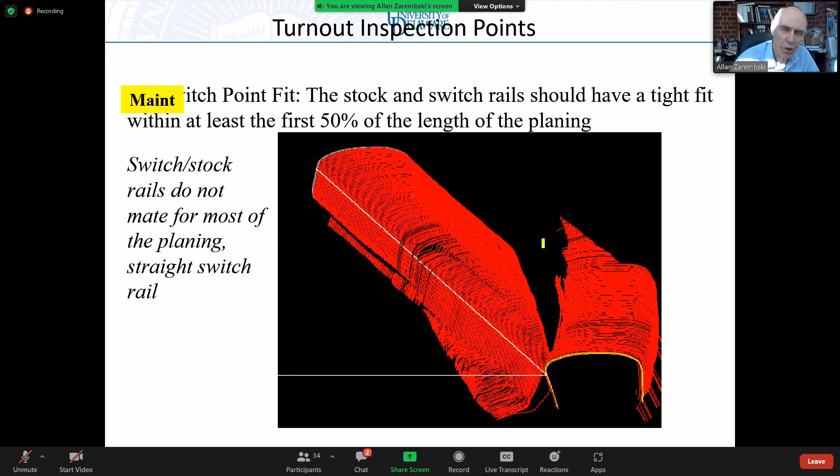Here is where the switch point and the stock rail are not mated to each other. The switch point is hitting the stock rail at the tip, but then it separates all the way through. So this is a dangerous situation.

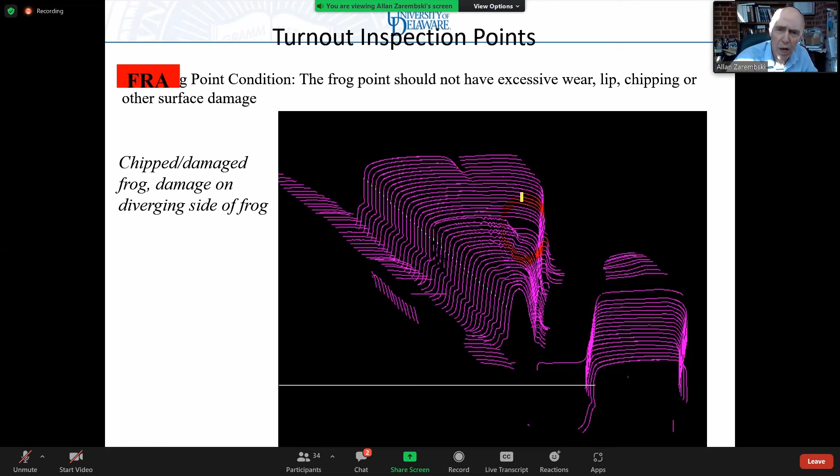Damage to the frog. Damage wear to the wing rail, which you can see right over there.

The center, remember the wing rail, the frog basically has two gaps. If that middle piece gets too low down or the wing rail gets too high, that indicates a very high batter.

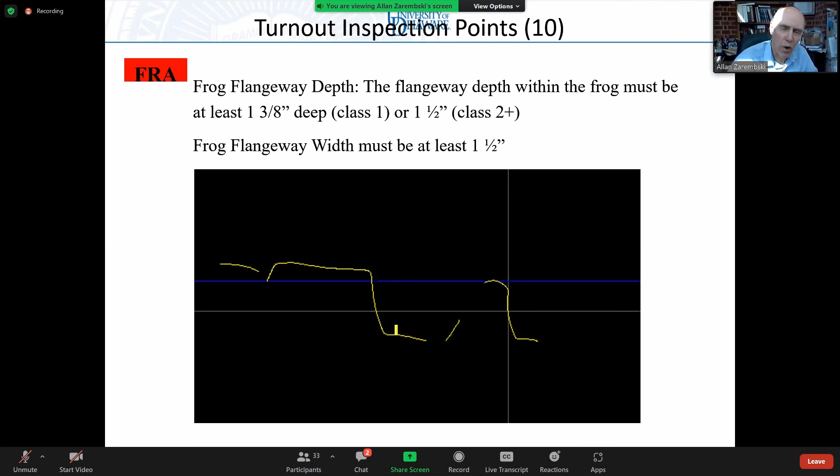Likewise, flangeway depth is not adequate. The depth between the top of the frog and the bottom of the gap is too small. That means that I'm going to run on my wheel flange, and I run the risk of wheel climb there.

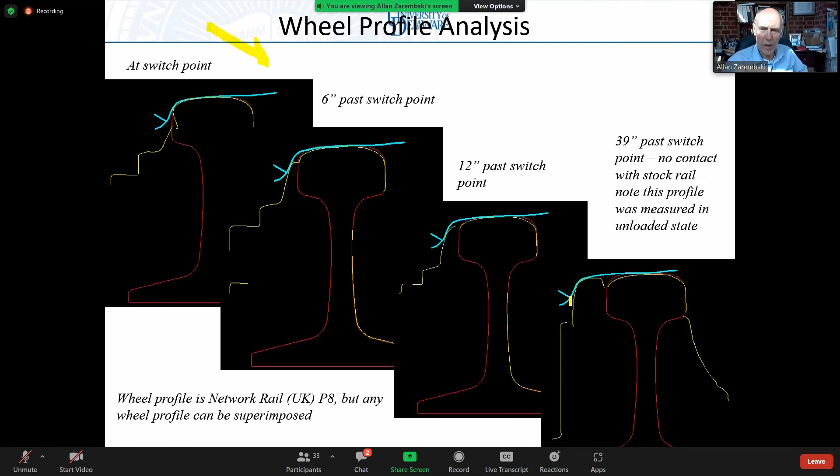So this is actually a British rail, a network rail safety criteria, the 60-degree angle contact. You can watch where the wheel contact's going through, going through my switch point in this direction. So you can see how my switch point is getting thicker and how my wheel rail contact is changing.

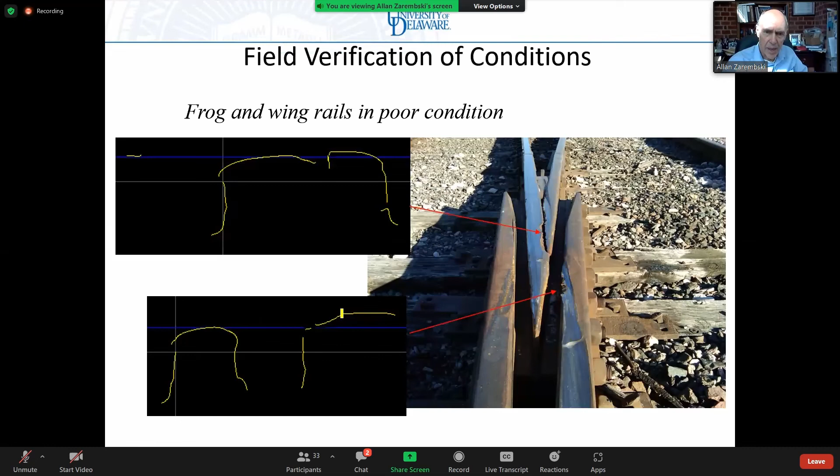I haven't shown you this picture before. This is a nice battered frog with batter on the wing rail. So there's the nose of my frog, that's what I'm looking at over here. And this batter is what I'm looking at over here. Again, that's this batter over here, and what you're seeing over here is over here.

And cracked, etc. Okay, before I leave this, any questions?

Either I did such a wonderful job of teaching that I got every one of your questions answered, or everybody's getting tired and hoping maybe he's going to leave and let me finish 10 minutes early and get out of here 10 minutes early. Okay, last chance for questions. All right, no questions. All right, so let's... Yes, yeah. Do I have a question?

The test, the test. Okay, so let's talk about the test. Test is going to be easy, I think. I've said it before and I'll say it again.

All the problems that I put on Moodle for this section of track, you're going to see again. So make sure you understand how to do all those problems. I covered all the material in class. The problem with the answer and the solution is there. You're going to see those problems.

Most of the test is very... if you remember my first test, which most of you did very well on, I think.